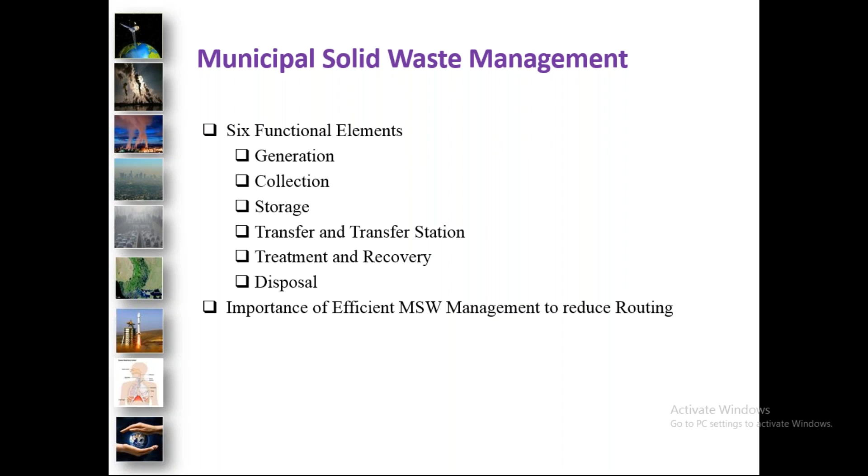I'll be more happy if you have a specific question about generation, collection, transfer station, or treatment stage, to discuss in detail at a later stage of the presentation. Moving on, what is vehicle routing? A brief intro.

As I have already mentioned, the importance of vehicle routing is significant, specifically regarding energy conservation, air quality improvement, coping with traffic congestion issues, and cost savings.

Energy conservation: if you have planned your vehicle routing smartly and intelligently, for instance, we have a vehicle commuting waste at 100 kilogram per meter cube density, and the waste amount is 1 ton. For that, you need 5 vehicles to commute or transfer that waste from one place to another.

But if you could compact that waste, reduce its volume, and increase the density to roughly 250 or 300 kilogram per meter cube, or even up to 500 kilogram per meter cube, you would reduce the number of vehicles required from 5 to 1, directly eliminating 4 vehicles from the routing. All the fuel those 4 vehicles would have needed is saved now. That is basically energy conservation.

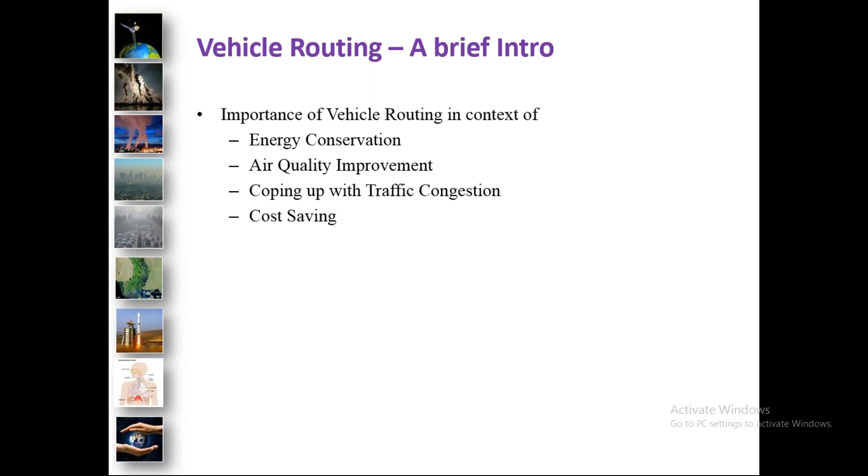Moving on, this is a simple overview. One method is basically municipal solid waste management efficient management. The direct collection is where you load the waste, and then that vehicle transports the waste directly to the disposal site.

Now what is the problem with this approach? We are living in Lahore city, which covers a large area roughly. For example, there is this town XYZ, say Johar Town, and Thokar Niaz Beg is a point in Lahore located roughly on the western side. The collection site, roughly Mahmood Booti, could even be 25 to 27 kilometers away from your generation point. So you are basically routing your vehicle for 25 kilometers. This is direct collection.

Second is the two-stage collection. Here your vehicle is loaded and transferred first to a transfer point, and then from that transfer point the waste is disposed to the disposal site.

Next is the three-stage collection. Here there is primary collection by cart, so the need for vehicles is eliminated. Then there is a first transfer, transported by a small vehicle to a second transfer point, and then it is transported to a disposal site. This is a three-stage collection.

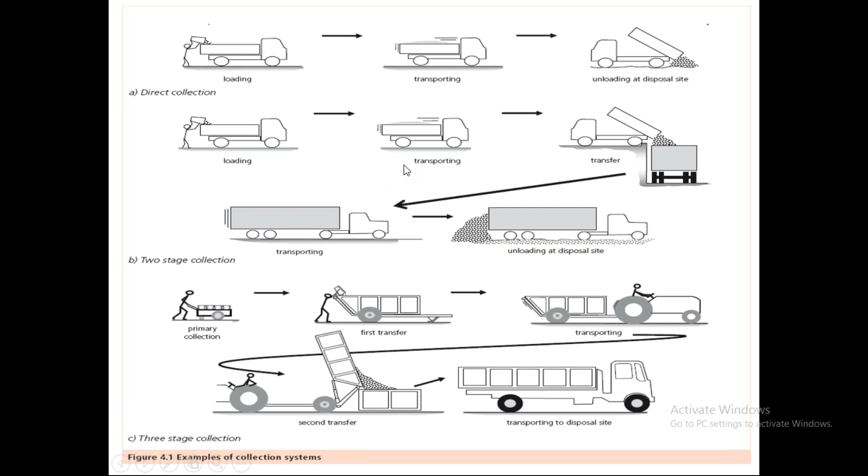So if we increase the capacity of that vehicle, only a very minute difference in consumption occurs. If you had to employ two vehicles for waste transferring, it could consume like 20 liters. If you employed one vehicle with better capacity, it would only consume roughly 12 to 13 liters. So you have a saving of 7 liters. This could be another approach for comparison.

So what are some common rules that should be looked after for planning a better routing? A route should not be fragmented or overlapping. Each route should be compact, consisting of segments. This is something that the vehicle routing should be planned around.

We will be looking at 4 to 5 examples of this, that on each road the vehicle should not travel or pass from one place twice at best. So we will be studying this.

The collection route should be started as close to the garage or motor pool as possible. What is the idea behind this? Because if there is a garage or motor pool nearby, every single kilometer of that vehicle's routing is being useful. Otherwise, the vehicle would have to travel a separate distance to cover the points left between the motor pool or garage and the first collection point.

Heavily traveled streets should not be collected during rush hours. This is important in cities like Lahore, Karachi, or Delhi, where there is traffic congestion during school, college, university, or office hours. If you commute during rush hour, it could take 1 to 2 hours, but at a normal time on the same highway or main road, it might only take 15 to 20 minutes. So you could save a lot of fuel by choosing your collection time carefully.

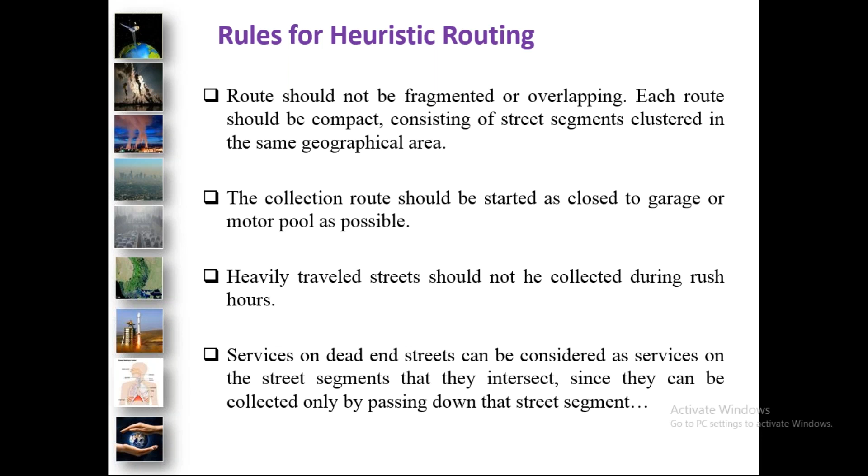For services on dead end streets, better planning is needed. For instance, waste could be manually transferred by cart or small vehicle to the collection vehicle, because if large vehicles route through that street, it may cause traffic congestion or blockage, plus there would be issues reversing the vehicle. So you should not take large vehicles into a dead end street; manual or small carts should be used to transfer the waste to the main vehicle instead.

The dead end street must be collected by walking down, backing down, or making a U-turn, so when practical, steep hills should be used.

Another point: in municipalities like Rawalpindi in our country, or hilly areas in India and Sri Lanka, it's good to collect waste while moving downhill. This is better for safety and ease, and it conserves fuel since the vehicle spends less fuel commuting with the waste, and it reduces wear and tear on the vehicle. So the higher elevation should be at the start of the route. This is more specific to hilly areas, and backing up should be avoided; manual lifting should be used instead.

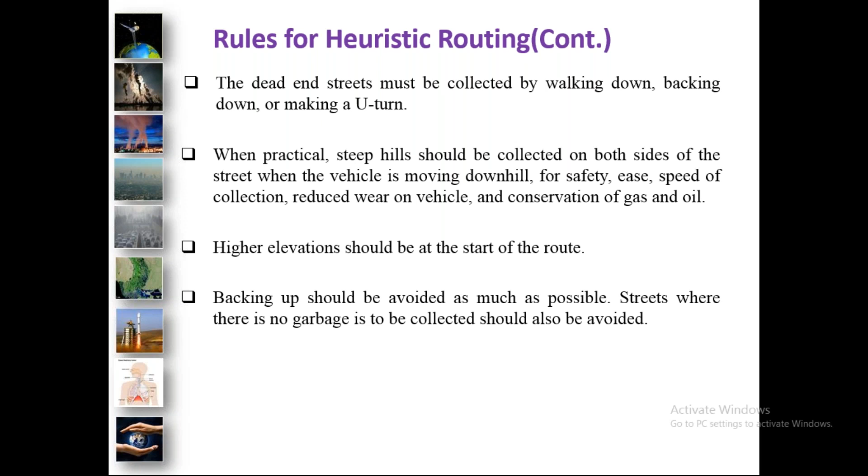As discussed, the collection route should start as close to the garage as possible and should also end as close to the waste's final destination. Because if it ends far from there, the vehicle would have to commute further to cover that distance.

A street should not be traveled twice. It should be traveled once only if waste is being picked from both sides at a time. If for some reason it's impossible to pick waste from both sides, then it could be traveled twice, but we should avoid that scenario. For certain block configurations, in case of collection from one side of the street at a time, a specific routing pattern should be applied, which I'll discuss with examples later on.

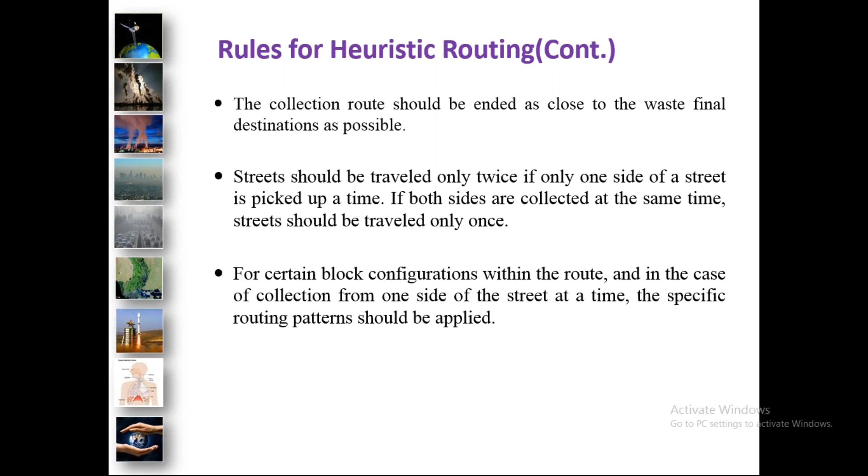So there are these three blocks, let me show you with this laser pointer. We have to define a starting point and finishing point. Instead of planning unintelligently, we could start from a defined point, like here. If we start from here, collecting waste on the right side, then commuting and collecting the right side again, and so on through each block, you can see that in one trip nothing has been overlapped, there is no U-turn, and no dead end is met. So the waste has been collected very efficiently.

Dear Mr. Ehsan, can everybody hear me?

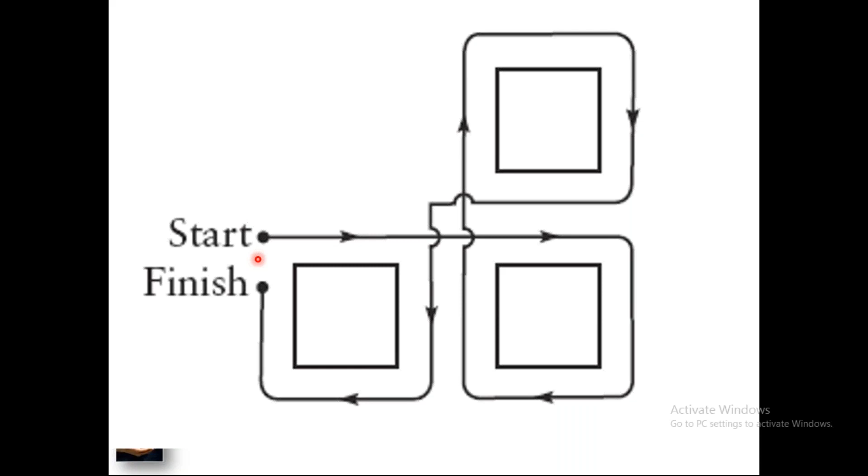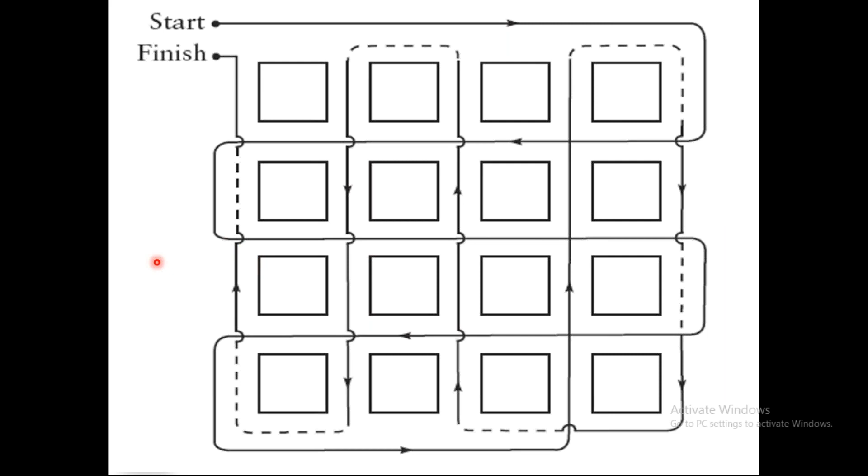This is a bit of a difficult scenario, but we could have a haphazard-based collection whereby we first collect from one way, then head to this deadhead or that deadhead, and there is this steep hill as well.

So the vehicle has started commuting from somewhere here, and it has reached a dead end, collected waste from here, reached another dead end, and then continued commuting from here.

As you can see, this is a steep hill, so we haven't collected waste from other blocks yet, because doing so would consume a lot of fuel, cause wear and tear, and affect every other aspect.

We haven't collected waste from these blocks while doing this routing. We started from here, reached a dead end, then there's a steep hill, and at this point only two blocks have had their waste collected so far.

Then there's this steep hill, then this block, then this routing, then one way, and then it goes upward again. This block's waste is collected, then this side's waste is collected, and then it moves to the garage.

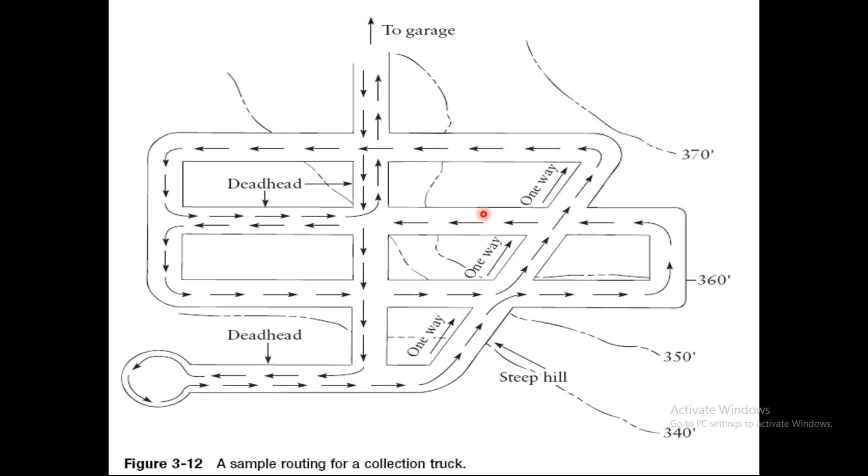So now I hope I have made a good case about how intelligent routing or planning, and good planning, could basically save fuel. Not only fuel, it could promote energy conservation, but it could be economic as well. We all know that countries are importing fuel for consumption, so there's a fraction of the import bill from this fuel import.

And then traffic congestion, smoke, and mismanagement of waste, all these could be avoided by simply managing waste efficiently. And for that management...

As far as our current topic goes, it could be the vehicle routing. So now what is a transfer station? I hope you are familiar, but just for introduction: the transfer station is basically a point whereby instead of directly commuting or transporting waste from the generation side, or collection side, or secondary storage side, directly to the disposal side...

For instance, there could be 100 vehicles collecting waste, or 1,000 vehicles collecting waste from a big city, or 100 vehicles collecting waste from one block of a mega city. So instead of those 100 vehicles commuting to the final disposal point of the city, all these 100 vehicles could basically commute to one central transfer station, of some 5 to 7 transfer stations in that city.

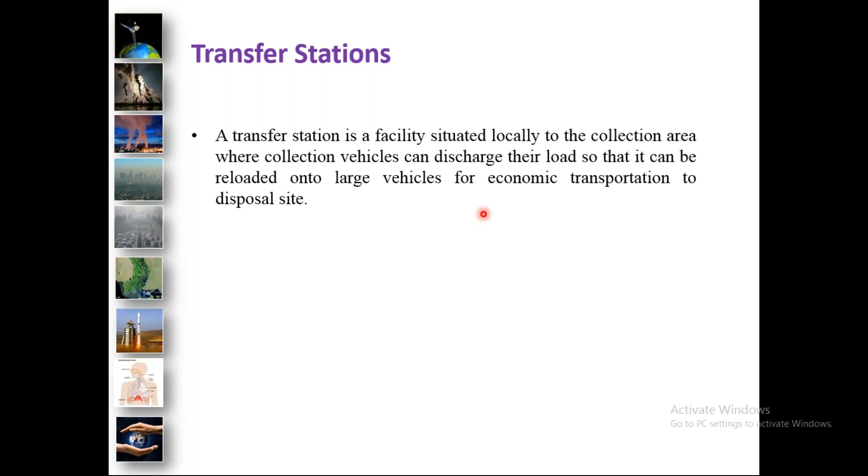And how, in terms of cost, would we reach the point that we need a transfer station? When your cost of transportation, mainly because of labor cost and fuel cost, exceeds the cost we would have with a transfer station - that is a break-even point. Once that break-even point is reached, then we know that we need a transfer station, and we would be saving cost.

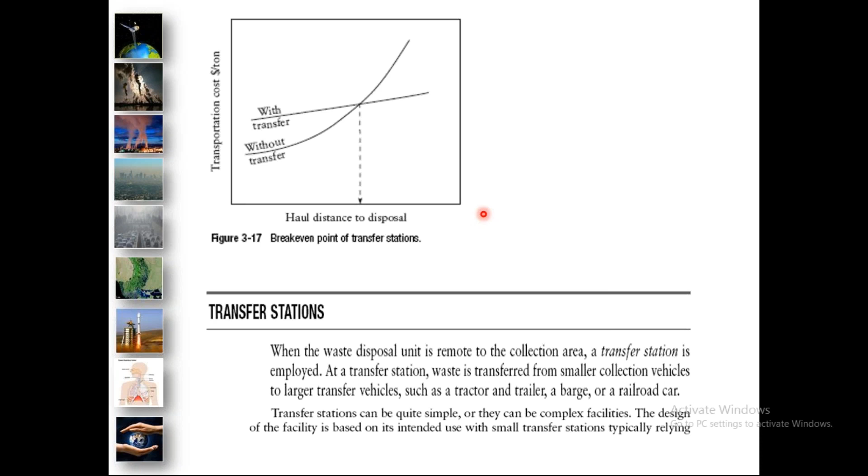In terms of cost, we will be saving fuel, and in terms of fuel, we will be saving energy. So energy conservation is a major problem - that's a major way out for climate change mitigation. So this is the point.

Transfer stations: two main types are there. There are primary collection vehicles, usually motorized, and then there are some advanced types we will be discussing. And why is there a need?

Firstly, direct hauling to the processing center or disposal site is no longer economically feasible, as explained in the break-even point. And then when the disposal site or processing center is a remote location - for instance, in my own city Lahore, the disposal site could be 30 kilometers away from the generation point - that is quite a distance to cover by all the vehicles, so then we need to have a transfer station in between.

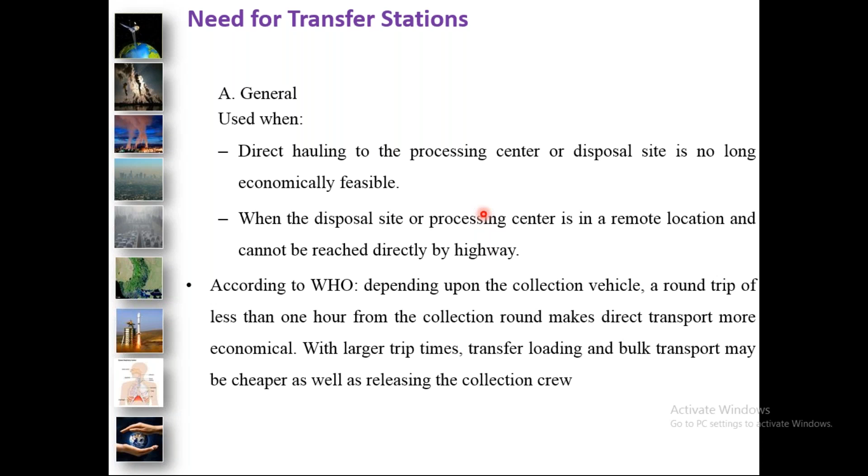So the World Health Organization also advises on the basis of economy, but as we know this is an economic issue for us as well - it's more like an air pollution issue, it's more like fuel consumption, it's more like energy conservation. So wherever we are saving some cost, we are also saving energy as well, and it's vice versa as well.

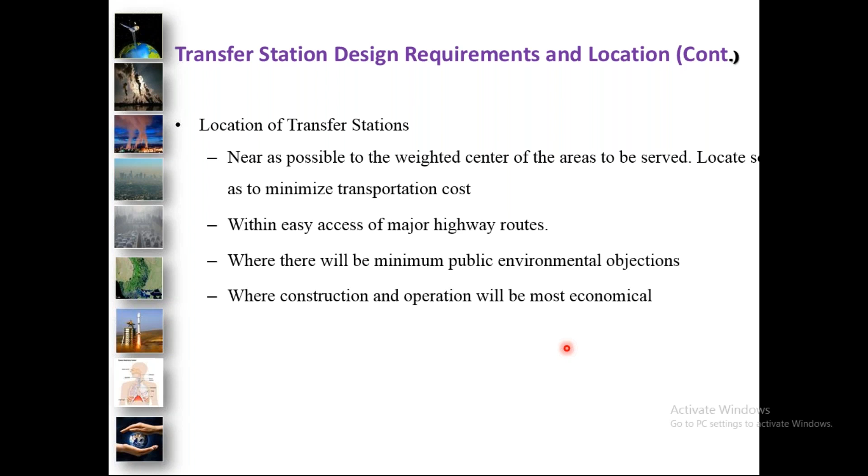Economics of transfer stations: where it should be located - as near as possible to the weighted center of the areas to be served, within easy access of major highway routes, where there will be minimum public environmental objections, and where construction and operation will be most economical. It should not be in a very urban commercial area - it could be in an area like downtown, whereby it would not be that much expensive.

So that is the previous picture. There are three types of transfer station: one is direct load, then storage load, and then there is combined.

In direct load, you have, for example, 100 vehicles, and you are basically unloading those 100 vehicles into 2 or 3 mega big vehicles. So this is direct load.

In storage load, you basically unload that waste, and then you have storage, and then you do some compaction and treatment that I'll explain in the next slide. This is storage.

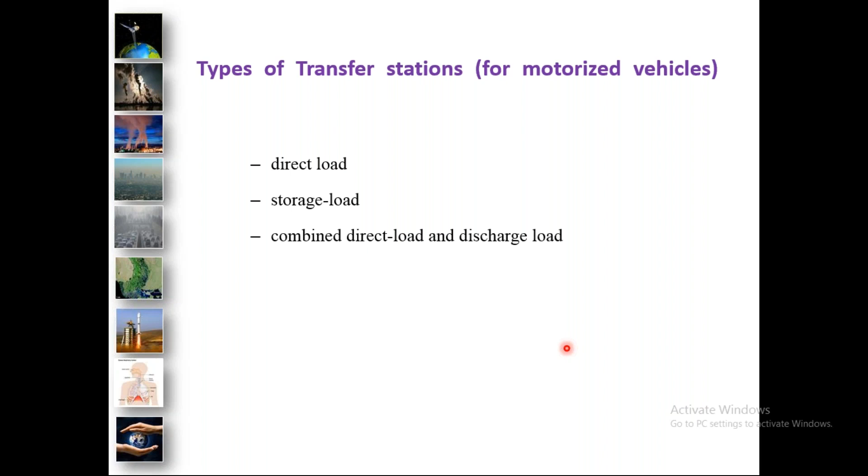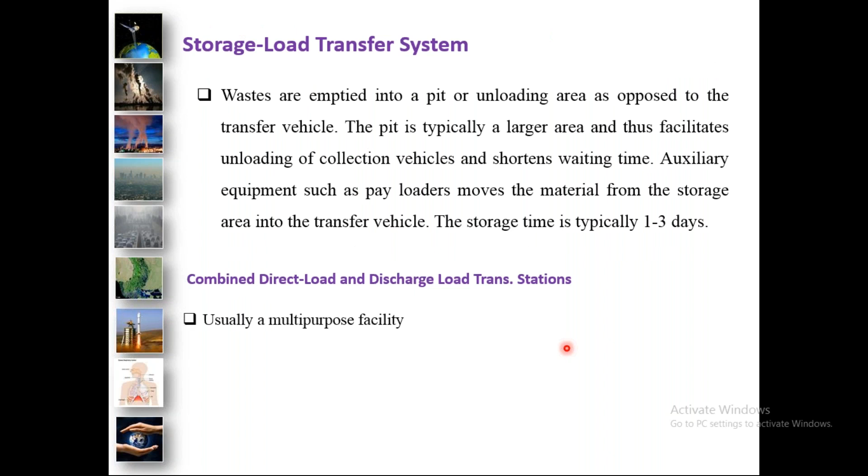And then you have multi-purpose facilities, whereby you could decide it's a direct load, or we should have it stored and then move on. So this is an explanation of that. Now I'm just finishing, reaching the conclusions as well.

We have a very mega city like Karachi, Lahore, like Delhi, Mumbai, or some mega cities. So the waste is being produced from one point that is away 25 to 27 or 28 kilometers away from the final disposal point. And the fate of that waste is disposal.

And we are all familiar that we are basically making some good, mashallah, achievements and good improvements in the waste management system. But there are very few efficiently designed landfill systems in our whole SAARC region, and specifically in Pakistan, there could be only a couple of landfill systems functional.

Other than that, there are dumping sites, and those dumping sites will basically again be a source of air pollution, noise pollution as well, and then there could be aesthetic pollution, land pollution, water pollution when this leachate is produced. And most importantly, the waste will be decomposed, causing emission of methane, which is a greenhouse gas emission, leading to climate change and global warming. So all that scenario is there.

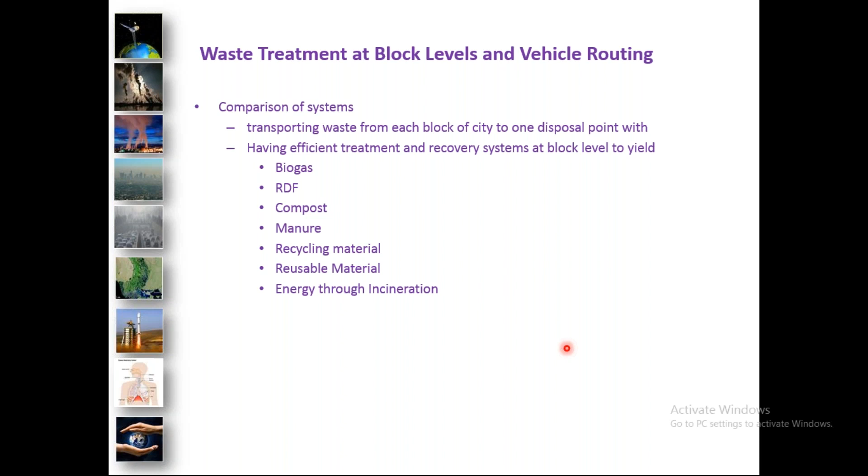This is basically the Paris Agreement, which is a landmark. This is now driving action towards energy conservation, waste management, waste to energy, and other measures. This has been the landmark agreement attended by roughly 190 heads of state, in Paris, in 2015.

So, dear Ehsan, Mr. Ehsan, I'll try to play the video. Should I try it, or do I have time for 2 to 3 minutes? Though you have covered your time, if you think it's worth it, you can go ahead. If it is 2 to 3 minutes, yes, please go ahead.

The device should be there. I don't know how loud the mobile phone device would be, but I'll try. I'll let you know, but try to be done with this video. Try to conclude your presentation after this video, it's the last one. Please go ahead. Thank you, thank you.

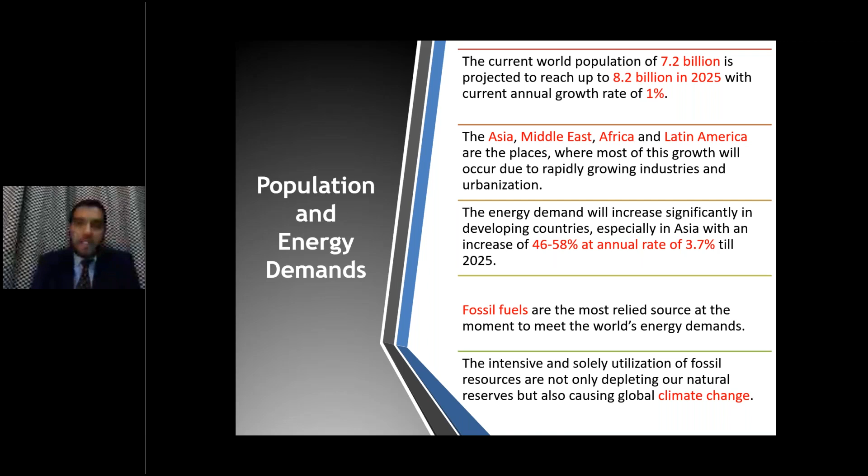So obviously it's quite natural to expect that as energy demand, population, urbanization, and industrial growth all increase, the generation rate of municipal solid waste per capita per day is also increasing exponentially and significantly. In the next 15 years, the municipal solid waste generation rate per person per day is predicted to increase from 1.2 kg to 1.5 kg. Globally, by 2025, the world generation of municipal solid waste is also going to increase, up to 2.56 billion tons. That's alarming. That's a huge number indeed.

And in most of the developing world and developing nations, cities, municipal solid waste management is the city's single largest budgetary item.

That means if the city economy is good, then we see the municipal solid waste collection, transportation, and disposal schemes are fantastic, wonderful. And if the city economy is not good, then we see the devastating effects of the waste, not only to the climate and the environment, but also to the public health.

Overall, the sustainable disposal of municipal solid waste in the developing world is at infancy level, where most of the focus and activities are concentrated only on collection, transportation, and disposal to dump sites and landfill sites, which are mostly non-engineering, open landfill sites and open dump sites.

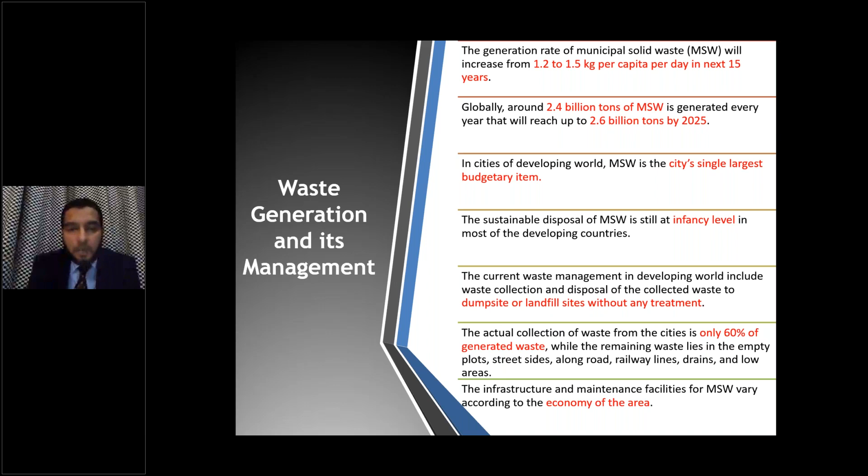As a scientist and researcher, I always propagate and advise that we shouldn't be shocked about this. We have so much waste, but there are alternative ways. We should not lose hope. We have to be opportunist in a way - I always give this example of cats: when they see a garbage bag, they are more opportunist, they see so many food items for them. Similarly, we have to look at waste in a different way, in a different perception.

And this is nothing new, it has been witnessed and described all over the world - that waste is no more a waste. It's not refuse, it's not garbage anymore, but a valuable source, and a range of products we can make from this waste: energy, recyclable materials, value-added products, chemicals, fertilizer, and so on. But we have to manage our waste wisely and in a sustainable way to get all these value-added products at the end, where we do not have any more waste.

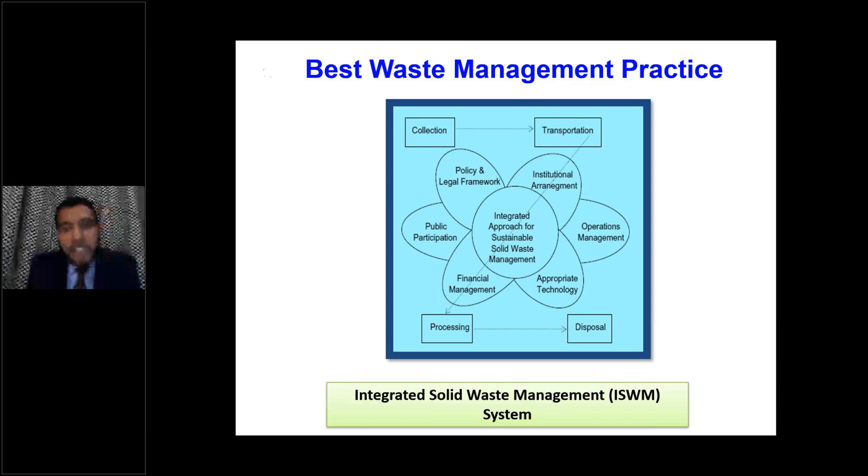And here comes the concept of waste to energy. This concept is amazing, fantastic, in a way that any nation or country who wants to cut its fossil fuel addiction, reliance, or dependence has this option of waste to energy - a promising option to look at besides fossil fuel, having waste-to-energy technologies in their country.

And the possibilities for converting waste to energy are many. There's a range of options and technologies, but those technologies really depend on the waste type and source, its composition, the end use application, available infrastructure, and the conversion technologies. Giving you a few examples of waste-to-energy technologies: pyrolysis, anaerobic digestion, incineration, transesterification, gasification, refuse-derived fuel, plasma arc gasification, etc.

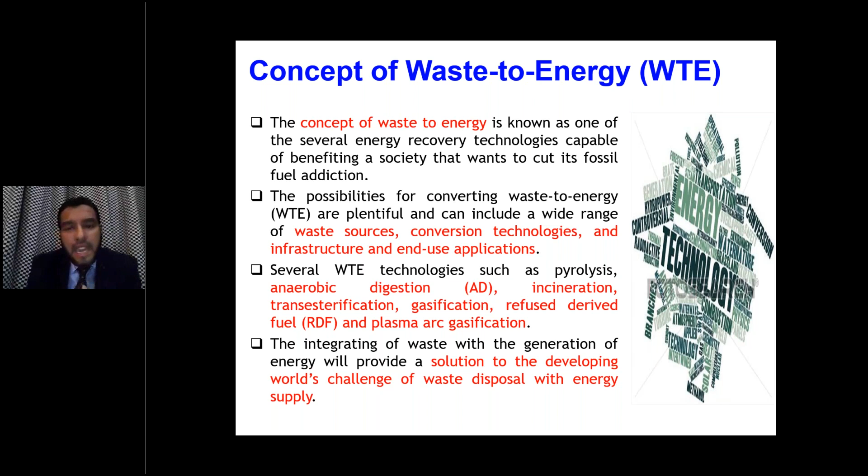Here I want to clarify one of the concepts, because I work in Saudi, and I have the opportunity to travel all around the world and to work with world leading organizations like World Bank, UN, UNEP, about waste to energy technologies. There's a big misunderstanding or misconception in the public perception when they talk about waste to energy technologies.

Waste to energy technologies is not always about thermal technologies. When people have bad press or criticize waste to energy, they say it's incineration, it's only burning. But it's not only incineration, there is a range of waste to energy technologies.

Broadly, we categorize them into thermal and non-thermal. Under thermal technologies, we have incineration. But the concept of incineration has changed, it has evolved. It's not like two decades ago when we saw open burning with all the air pollutants and dark smoke coming out. It's not like that nowadays.

And then we have gasification, pyrolysis, plasma arc gasification. Among the non-thermal waste to energy technologies, we have options of anaerobic digestion, fermentation, transesterification, mechanical biological treatment. They are also classified based on chemical technologies, physiochemical technologies, thermal and non-thermal. But it really depends on the situation of the country or the city and the waste composition.

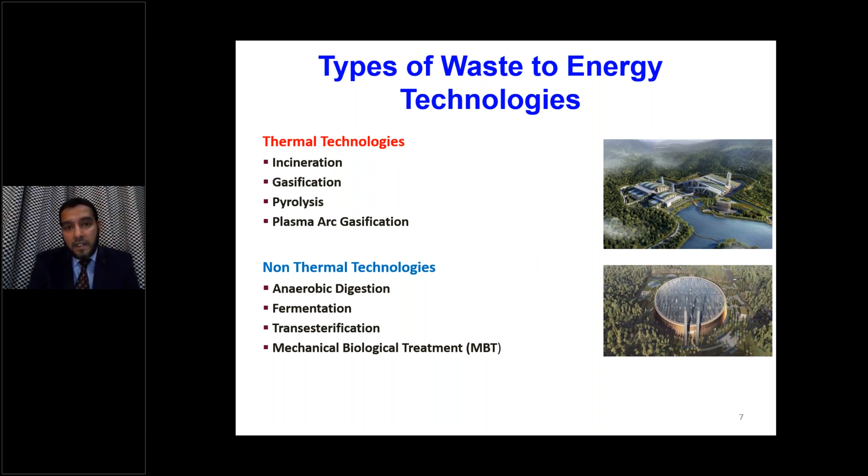So I hope I clarified this concept, that when we talk about waste to energy, it's not always about incineration, it's not always about burning of the waste. The concept has now evolved and developed beyond that basic concept.

This is very important when choosing waste to energy technology criteria for any nation or society or city that wants to develop waste to energy technologies in its city or country. They have to look practically and realistically at the waste type, amounts, composition, and waste characterization. This is the fundamental criteria of developing or selecting any waste to energy technologies.

I have seen in the literature many waste to energy technologies that failed practically. One of the fundamental or core reasons was the waste type, amounts, composition, and characterization. It's not always about importing waste technologies from the west to the east and adopting, copying and pasting, developing as-is. No, the country has to look at its own waste before developing or selecting any appropriate waste to energy technology.

I'll give you an example of such failure. I work in Saudi, and I have seen, in Mecca, as most of you know, during Hajj time there is slaughtering of millions of goats and sheep. They proposed this waste to energy technology of incineration for slaughterhouse waste. Basically, among the slaughterhouse waste, when they started putting blood waste into the incineration, obviously no one can expect energy or something valuable by putting liquid in an incineration. It won't work. So practically, this incineration plant failed in Makkah, and the reason was they didn't look into the waste composition of the city.

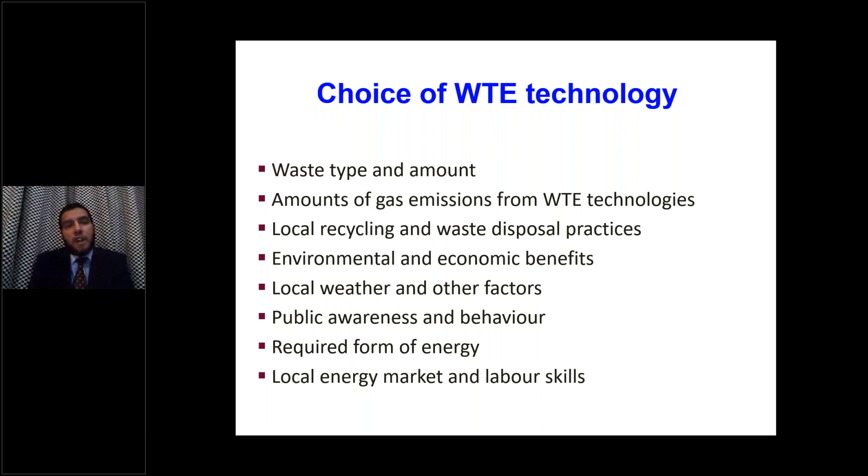So far, if I talk about the progress and development done in both the scientific and industrial communities, so far work has been done on single waste or single waste type technology.

Let's say if I talk about animal waste, there are technologies for fats, tallow, and blood. The fats and tallow are very good for rendering and transesterification to produce biodiesel and other products. Blood is a very good substrate for anaerobic digestion to produce biogas.

And then we have the meat processing waste. Then we have manure. Manure is sometimes good for anaerobic digestion, sometimes for the nutrient recovery facility for composting. So far researchers and scientists have worked on single waste type and single waste-to-energy technology.

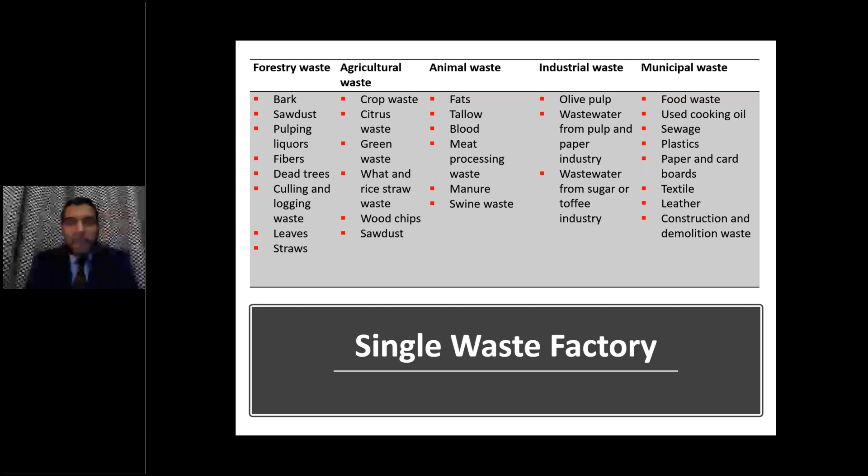So I'll give you an example. The waste-to-energy technology is not a new concept. It's a very old concept, and it has been successfully implemented all over the world. I must say it's not in some country or some region - it's everywhere.

We can see the plants all over the world. I just put a few examples as snapshots for you, giving you this idea that waste-to-energy plants exist. They are working fine, and as a result of these plants, they are producing electricity, heat, biogas, and so many value-added products.

So these plants exist everywhere, but most of these plants are based so far on thermal principles. Most of the operations or technologies used in these waste-to-energy plants are based on thermal principles - either incineration, pyrolysis, or gasification. They use different temperature ranges to treat waste and produce value-added products at the end.

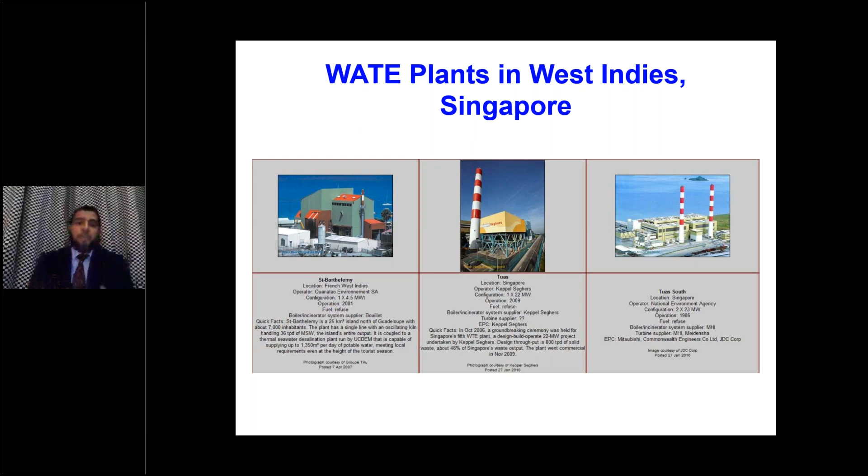The people's perception is good because many of these plants are developed in the middle of cities. They invite people, they make sure all of their emissions are environment friendly - there's nothing harmful coming out from their incineration plants. But the point is, I always raise these questions for scientific brainstorming.

Can any of the waste-to-energy technologies achieve the zero waste concept? I'm sure you know this concept, the zero waste concept - they say there's no more waste left for landfills, 100% of the waste is being utilized for useful purposes. So can any single waste-to-energy technology achieve this zero waste concept?

Can any conversion or waste-to-energy technology replace fossil fuel dependency in an immediate, short-term way? And are these waste-to-energy technologies capable enough to compete with other renewable energy systems like wind, solar, geothermal, nuclear, etc.? If I conclude the research and development done so far, the answer might be no for all of these questions. The research is ongoing, the development is ongoing, but so far the answer is unfortunately no.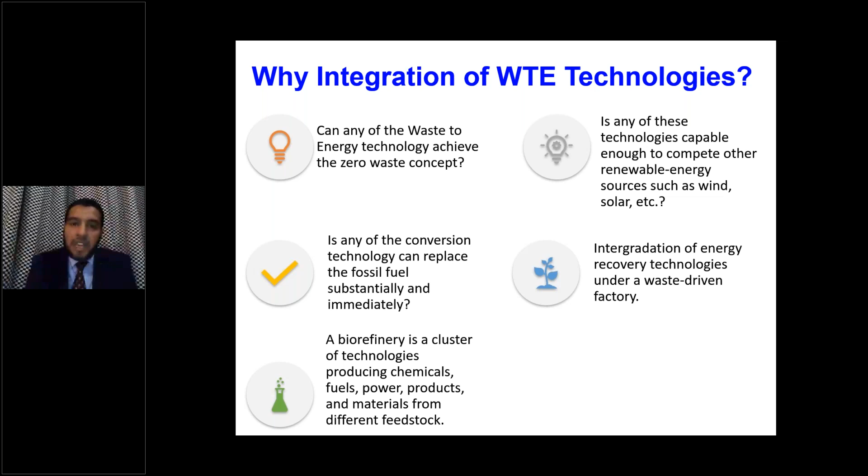After my postdoc, I joined King Abdulaziz University. So me and my research group, after establishing my team, reintroduced this concept in the scientific community and in the professional and industrial community, and we gave them the solutions. We gave them the answers to overcome the limitations and challenges of single waste-to-energy technologies. There is a sustainable solution for all of these challenges, limitations, and difficulties.

If you integrate your waste-to-energy technologies under one umbrella, under one roof concept of waste-based biorefinery or waste-driven factory—it's a bit complicated concept, but I'll try to explain it to you.

Five years ago, it was a huge success for me and my research team, and we were quite successful in the scientific community, the local public, the policy and decision makers, as well as the industrial communities.

Because basically, let's say I work in Saudi Arabia, where food waste is the highest waste stream, around 50%, and plastic is the main second stream. We are not giving the solution for only food waste, or plastic waste, or cardboard waste, or metals, cans, or paper waste. No, we are giving the solution for all municipal solid waste at one place, and this place we call the waste-driven factory, where you can bring all of your waste.

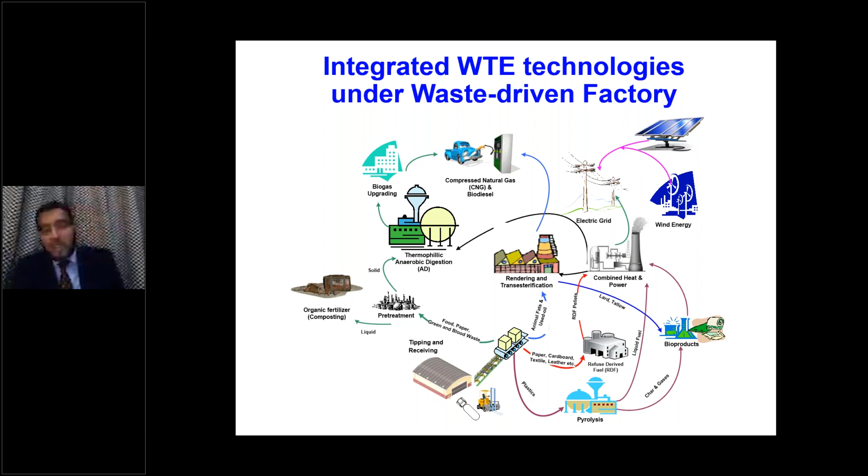So I give you a case study of Saudi Arabia. This is something I'm sure is very informative for you. When we started working in Saudi, we realized there's no energy recovery facility existing in the Kingdom of Saudi Arabia. Most of the municipal solid waste is collected, transported, and disposed to landfill or dump sites without any treatment or recovery. Most of the landfill sites there are open landfill sites, among the mountains, non-engineered, non-sanitary landfill sites.

If I talk about recycling, it's only with metals and cardboards, and the ratio is very low, around 10 to 15% of the total municipal solid waste. As a result, all of the putrescible waste—above half of the waste, around 50%, is food waste. When it goes to an open landfill site, as a result of aerobic and anaerobic decomposition, we have methane and other greenhouse gas pollutants and emissions. Not only this, the leachate goes to groundwater and causes soil contamination. The public health issues are also very alarming over there, increasing every day.

Every year around 15 million tons of municipal solid waste is produced in KSA, and the average rate of municipal solid waste per capita per day is 1.4 kg, which is the highest compared to the rest of the Middle East or Arab countries. Food and plastic waste are the two largest waste streams, covering around 70% of the total waste in most cities.

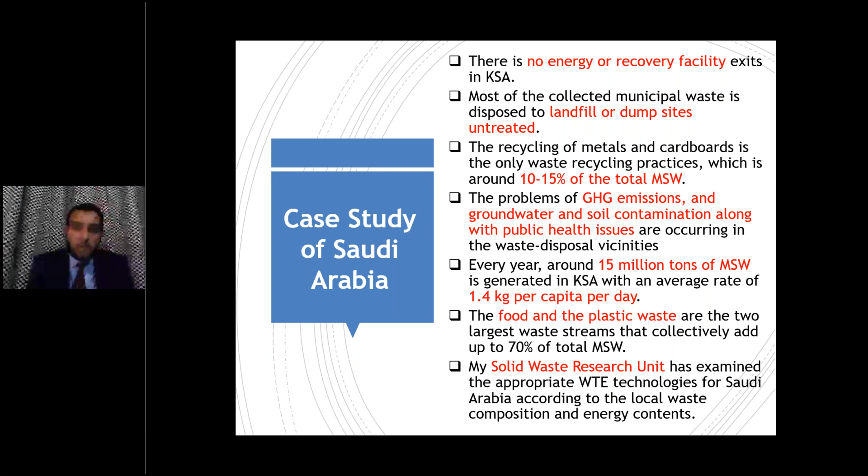So basically, my group, the Solid Waste Management Research Unit, started to explore these options to highlight the issues, and then we tried to draft letters to government officials. It was a huge success for my research team and research center, in that the government realized and took our recommendations and research findings.

They included, for the first time in their very famous Vision 2030, this potential of waste to energy, with a target to produce 9.5 gigawatts of renewable energy from different sources, including waste. Even the previous governmental regime recognized our research findings and gave the target to produce 3 gigawatts of electricity from waste-to-energy plants in the country.

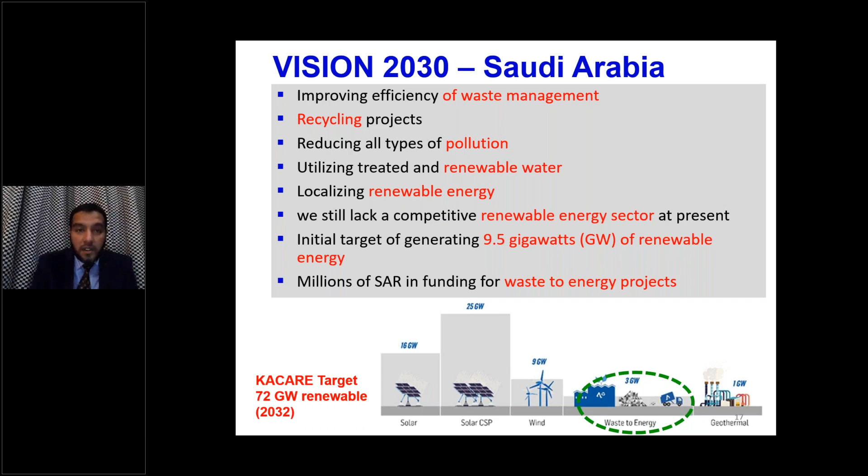Giving you more detail on how our work was so successful in the country and the rest of the scientific community and Middle Eastern countries, we mapped out each of the Saudi Arabian cities, city by city. Taking the example of Makkatul Mukarramah city—as you know, this is a very holy city where millions of Muslims come every year to perform religious rituals, Hajj and Umrah—they produce, as a result, a huge municipal solid waste generation in Makkah city.

We did waste characterization as a first step in Makkah city, characterizing each waste stream and looking into waste-to-energy and recycling options. We concluded that around 88% of the municipal solid waste produced in Makkah is very suitable for waste-to-energy technologies, and the rest, 12%, is suitable for recycling schemes. For recycling, we concluded that glass, cardboard, metals, and aluminium cans are ideally suitable for reuse and resale.

For the food waste fractions, including fats, oils, and slaughterhouse waste, we found anaerobic digestion and transesterification options and waste-to-energy technologies very suitable. As a result, we produce methane, glycerol, and biodiesel as products.

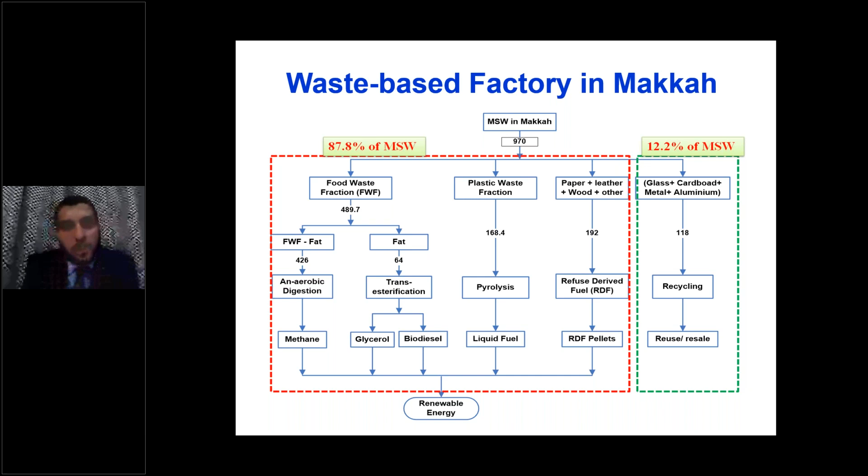I'll give you an example to raise your interest about our work - a snapshot of the economic and environmental benefits of waste recycling in Makkah. Just by recycling 4 items - cardboard, glass, metals, aluminium - the economic and environmental benefits are huge. We calculated that only by recycling these 4 items, we can save around 5.6 thousand tons emission of methane, which is huge in terms of global warming potential. The net revenue is around 113 million Saudi Riyal added every year to the national economy, and this huge money is only from one city, coming from just 4 waste items.

Because we give the concept of waste factory, where we have 2 units - the recycling unit and waste to energy unit - we calculated the individual benefits, economic and environmental, and the collective benefits. In terms of collective benefits, a total net revenue of around 758 million Saudi Riyal can be generated from this waste factory only in Makkah city. This revenue, the net savings, mostly comes from landfill diversion, electricity generation, and recycling.

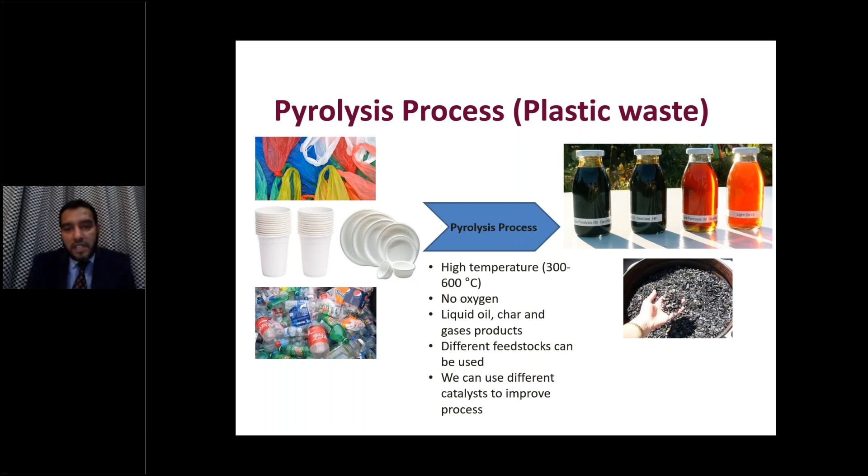In terms of my PhD students, two of them particularly from Pakistan have worked on this system, and they are now serving in different universities here as assistant professors.

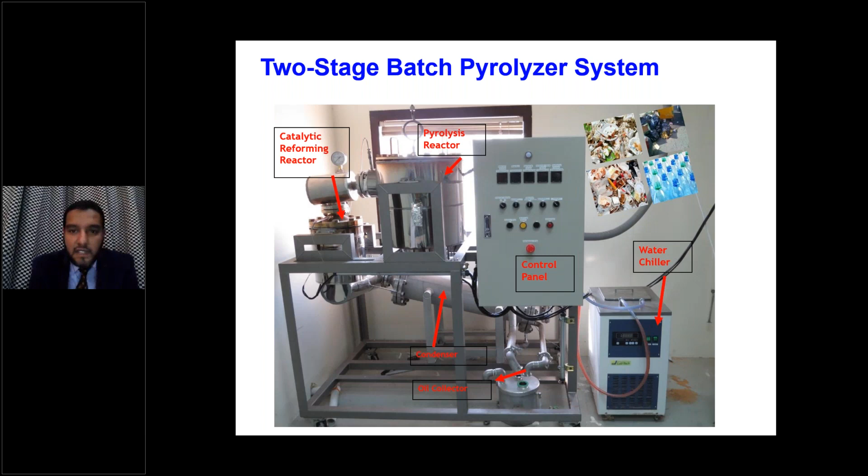In terms of the benefits of this waste-based factory, let me go back to the initial concept of my presentation. What we are trying to propagate is that waste to energy technology is a promising solution, but it's not a complete or ultimate solution. The ultimate solution is when we integrate these waste to energy technologies at one place, treating all different types of waste under one roof concept. Then we have multiple benefits instead of one, multiple products, and our economic revenue and environmental benefits are much higher compared to single waste to energy technologies.

So if we have such waste-based factories or biorefineries in our cities, countries, in SAARC regions, the benefits are huge. Many of these processes, when integrated, are still under research and development, so our young local students, researchers, and scientists will learn about these cutting-edge technologies. As a result, through a holistic approach, we will be able to solve our waste problems, minimize environmental pollution—whether air, soil, or groundwater—and generate new businesses and job opportunities in our countries. With all these benefits, public health will also be improved.

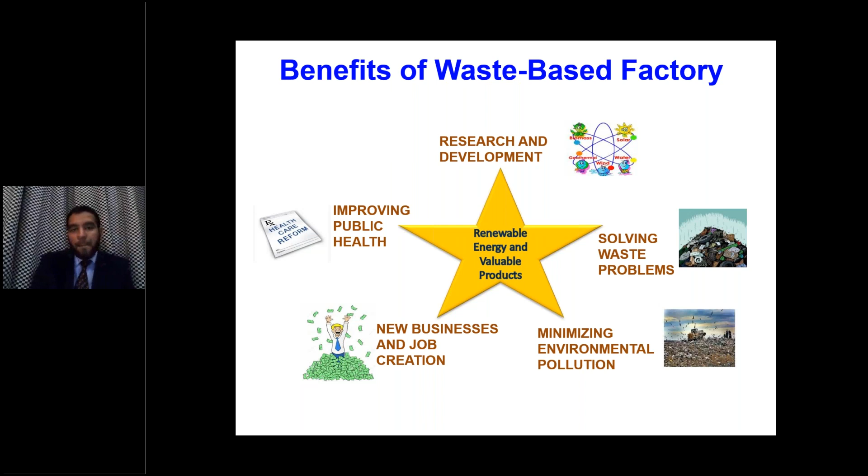Here I give you a successful example of my and my research team's work on waste to energy and the waste-based biorefinery or factory in Saudi Arabia.

We were invited by the government of the Kingdom of Saudi Arabia to design specialized training courses for governmental environmental inspectors at their environmental protection agency. We designed two courses and delivered them in lecture format to government officials, engineers, and inspectors. The government wanted to send them after this training straight to the UK and USA for master's degree programs, with the vision that after returning, they would become heads of their environmental protection agency departments.

So we designed two courses. My ambition in sharing these slides is that when I was invited for this webinar, I thought, let's propose these training courses to the SAARC Energy Center as well. I see the necessity of such courses in SAARC regions, including Pakistan, because our waste management systems are at quite an infancy level, and we need these training courses not only for students, graduates, researchers, and scientists, but also for policy and decision makers, officials, inspectors, and engineers working in different agencies across the SAARC region.

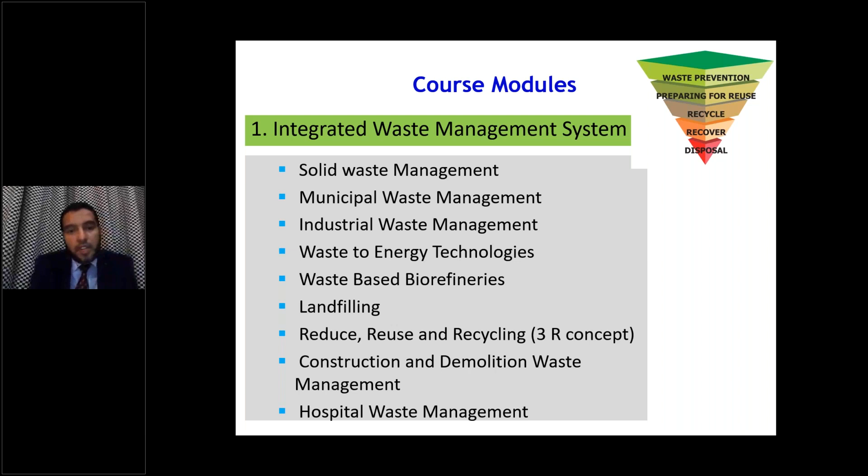The second course, which we've been delivering successfully for the last two years to government officials in Saudi Arabia, was on sustainability—introducing the concepts, the pillars of sustainability, how it works and can be applied to different departments and municipal solid waste management systems, as well as sustainable construction activities, sustainable resource management, smart building concepts, how they can be practically implemented in a city, and sustainable and resilient cities.

I was also involved as a consultant with the World Bank to produce documents for feasibility and assessment studies for Saudi Arabia. We completed this project quite successfully, covering solid waste management in Jeddah and the Dammam region. Such studies are fundamental and critical for making policy and developing an integrated waste management system for any country.

So again, I see a lot of need—I must say the imperative need of the time—in the SAARC countries, including Pakistan, for such feasibility and assessment studies, comprehensive studies at a national level about municipal solid waste management systems and waste to energy options and technologies.

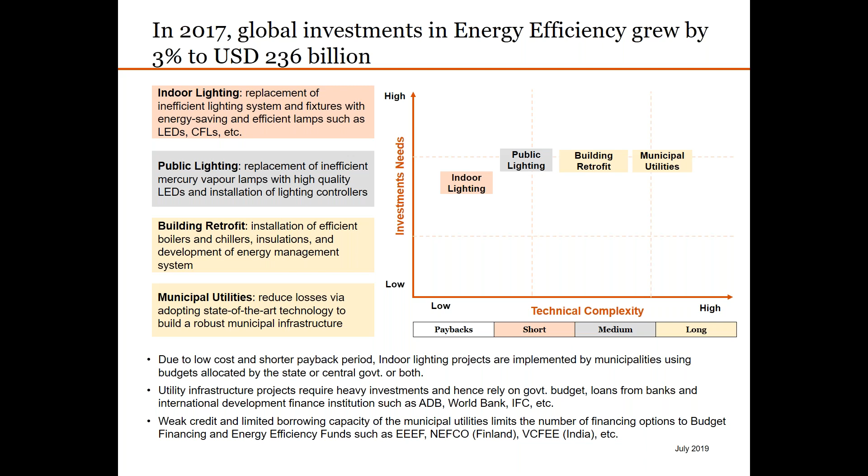So the goal, I think, for SAARC nations is quite simple. Our energy prices are rising. We actually end up paying one of the highest in terms of fossil fuel charges across the world. We have an increasing population, increasing consumption. Our resource requirement is high. We are big emitters of greenhouse gases, and we have to be conscious about climate change.

Municipal energy efficiency services can help reduce our energy cost overall, improve the service delivery. It can improve the quality of life of people by renovating the existing infrastructure, as well as, I think, the end goal is also to reach a stage where more businesses come in on the backdrop of better and cleaner infrastructure, leading to a better revenue profile for the local body as well as for the country.

In terms of energy efficiency, we have seen 2 broad types of contract. One is a turnkey project. Turnkey projects are typically taken up when municipal corporations treat energy efficiency projects just like a project of any other kind. They either invest through budgetary allocations, or they borrow from external markets in the form of bonds, etc., and they fund the project. There may or may not be direct recourse from that particular project.

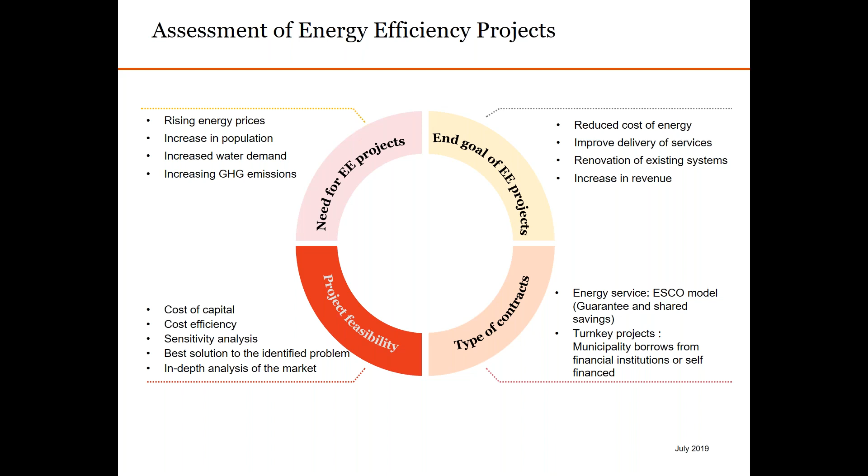Now, before talking about the sources of funding mechanisms for any of these projects, it's important to understand what typically the revenue and expenditure side for a municipal body would look like. In terms of revenue streams, most of them have tax revenues and non-tax revenues.

Within non-tax revenues, it is primarily to do with land registration fees, vehicle usage taxes, etc., which forms a part of their revenue. The other is tax revenue, which is about property tax, tax on animals and carriages, etc. Apart from that, most local bodies also get grants or budgetary funding from central or state governments in our individual countries. There could also be very small other sources of income wherein they look to sell some existing municipal assets, monetize real estate, etc.

On expenditure, and that's a big list, they generally incur a huge amount of administration and planning expenditure. Then there's the utility kind of expenditure, which is about distribution of utility services, be it water, waste management, in certain cases electricity as well, although in most Asian countries electricity is primarily done by a separate public utility, but across the globe in many cases the municipal local bodies also cater to that. Apart from that, there are other welfare schemes in education and women, etc. So the expenditure list is huge.

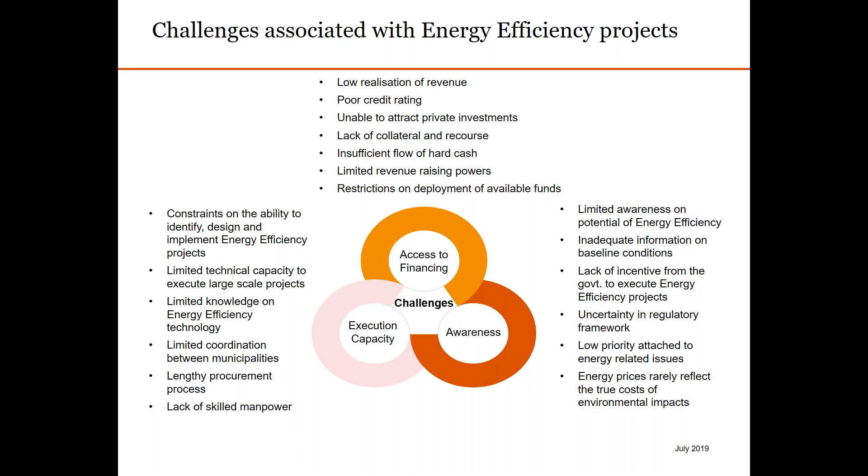Coming directly to the main topic, if we look at financial mechanisms, there are three broad blocks of financing available. One is pure public funding, which could be in the form of grants, where the government invests with no expectation of returns. Typically, grants in theory should be given to projects which are non-viable, developed in a very poor, below-poverty-line environment where people are unable to afford it, but it is important to develop. The next two are through budgetary allocation.

We have categorized this into two portions: general budget and budget capture. The difference is actually very similar - it's whether the repayment is funded through incremental revenues of the clean energy project, or funded as part of overall municipal corporation. So that's the only difference between the two, but essentially it means the government is making allocation for this project.

Public-private partnership model involves both public parties and private funds to fund energy efficiency projects. There are three different types that we typically see. One is energy efficiency funds.

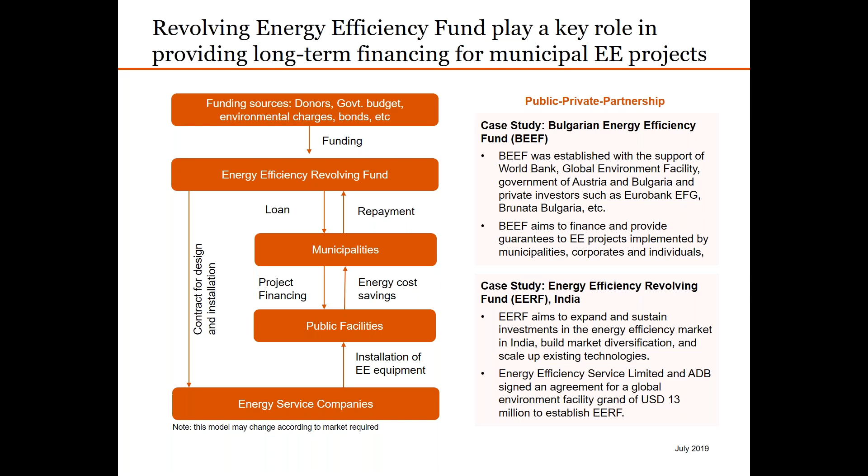In many cases, what we've tried to establish is that if small municipal bodies could come together and pool their assets, creating a much larger vehicle of clusters of assets, that can often be very attractive for raising commercial lending from the market.

This cluster program was something we were working on with the government of UK about a year and a half back, where we reached out to small municipal bodies and created clusters of assets. These clusters were then put on a platform to be introduced to larger lenders and green investors, who could come and directly invest in the cluster programs. So that helps in terms of small municipalities, while the larger ones would anyway have the means to raise funds.